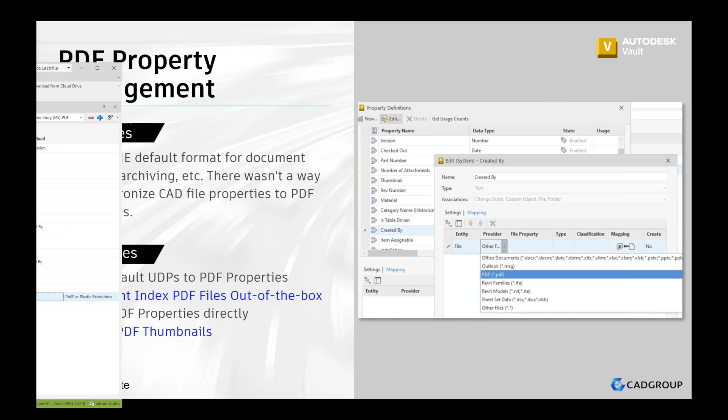Just to give you an idea of what content indexing is: if I'm searching for something at the very top here, let's say I search for the word PDMC, and make sure my file content indexing is turned on. If I search for that, it brings up that particular PDF. Although the word PDMC is not in the file name, nor in the subject or any of the mapped properties, it's called up because it's actually read the text inside the PDF itself and brought that up in the search results.

In the past, for us to achieve this, we needed third-party iFilters, which you had to purchase from an iFilter provider and install on the server. There were also security issues or risks associated with those third-party iFilters. Now you don't need any of that - it's available inside Vault straight away.

One thing you'd also notice is that now I have thumbnails, actual proper thumbnails for PDF files inside the Vault client. In the past, we'd only see a PDF icon, but now I've got a thumbnail. Of course, you can still use the Autodesk viewer to view that PDF directly, but the thumbnails are quite an interesting addition.

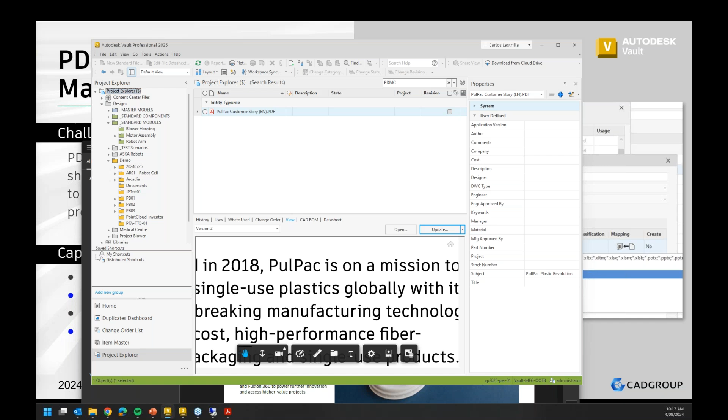Some of our customers have actually requested this particular feature - when you look at something inside the thin client. Let me log into the thin client... those thumbnails will also appear for PDFs. Sorry, I did not approve or release that PDF, I should have one that's approved. Bear with me - there we go. So that's a PDF, and you can see the thumbnail. Now, it's a bit small, still a bit small. Even if I increase the thumbnail column, it only stays that size.

So unless you've got zoom on your browser, and when it zooms it's not really giving us the expected result - at least it gives us a step, one step towards a great solution. But I find that very, very useful.

Just had a look at a question here: do you have to set up an SMTP server on the Vault machine for email notifications to work, or can it use any SMTP server? No, you can use an SMTP server that's outside, not installed on the Vault machine. So if your SMTP server is on another server on premise, or on the cloud like Office 365, you can do that. Michael, I hope that answered your question.

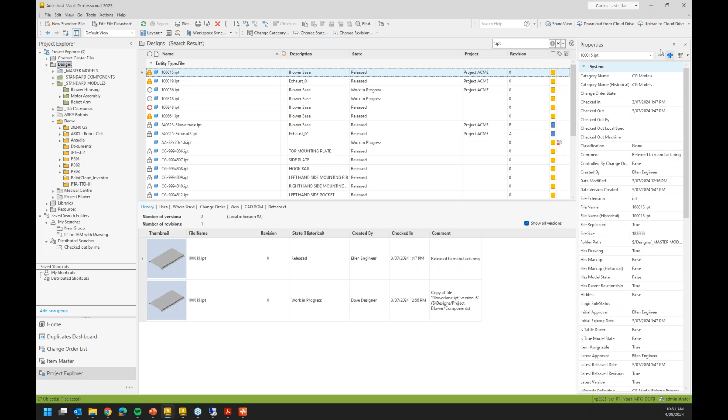Okay, one thing to be careful of is that search is now applying all throughout - that filter. So what you want to do is make sure that after applying that, you untick it. Otherwise, you might be wondering why your search results aren't giving you the results you're expecting.

This is another thing from the idea station: if you use items or custom objects, you couldn't copy hyperlinks for them. In the past, this option was always available for file objects, but not for items and custom objects. Now for items and custom objects, you have that copy hyperlink option. I will say though, it's still one item or one file at a time—you can't select multiple and do a copy hyperlink for everything at once. By the way, if you look at my slide deck at the bottom, you'll see which version this applies to. This specific feature is available in the 2025.1 update. Throughout the presentation, you'll see which update each feature applied to.

This is another one I find very useful, particularly from a troubleshooting perspective, related to multiple monitors. Let's say you're working from the office with two monitors plus your laptop, using Vault, everything's fine. You go home, unplug your monitors, and work on a single monitor or a different configuration, then do some Vault activities. All of a sudden you do, say, change state, and nothing happens—the change state dialog box doesn't appear. What's actually happening is the dialog box has appeared, but it's off screen because it was expecting to show on a monitor that's no longer plugged in. Now with Vault 2025, you can run a command line prompt—basically the Vault executable plus reset dialog locations—and it will bring everything back into the original screen.

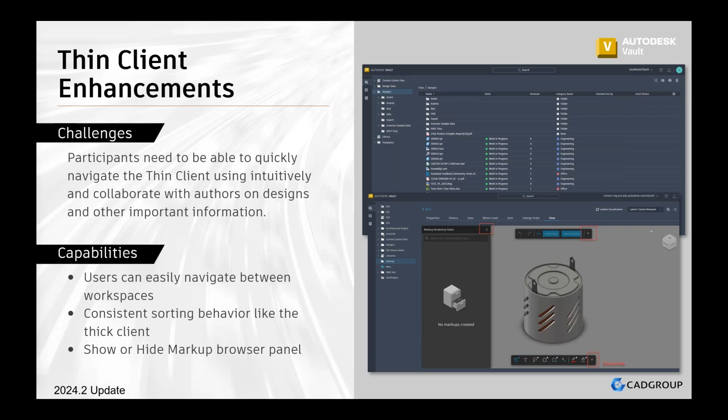Now if you look at participants, for those actually viewing the files, particularly those using the thin client, there's some small improvements. You can now navigate easily between workspaces, and let me give you a bigger view of this. You have these icons here on the side to navigate through the different workspaces that you've got. So that's quite useful.

You also have the sorting behavior when you're looking for files. The sorting behavior of the columns is very similar to the Vault thick client. In the past, if you had any shortcuts, it would put the shortcuts at the bottom, even though they were the same name. Now it groups them together consecutively as long as they've got the same name, same as the thick client. You also have this small feature: if you've got a very deep folder structure, which I don't, but there are some cases, you couldn't move this bar in the past. Now you can move that bar.

In terms of other enhancements, now you can also add your own logo into the thin client quite easily. In the past, there was quite an extensive workaround for that. Now that's out of the box.

You can also set what is the default landing page, so that when a user logs in, they will automatically go, for example, to the files workspace as the default. You can also hide other workspaces. So if you're not using items or change orders in your Vault, you might as well hide those workspaces, so that users who are using the thin client will only ever have the Project Explorer, the files area available to them.

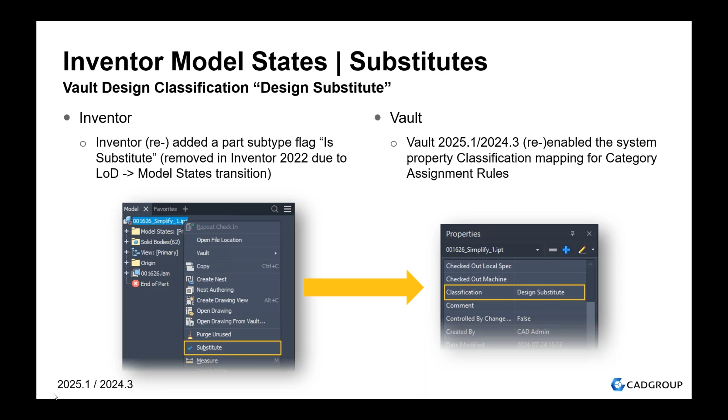The DXF flat pattern - when Vault 2024 introduced creating DXFs into the job processor for Inventor files, in the past, if that IPT file did not have a flat pattern, it would just say it could not create the DXF file. Now it's more explicit, saying it can't create the file because there is no flat pattern for that file.

Now, in terms of looking at the results of a job processor, in the past, if the error was long, or especially if you have a long folder path, you couldn't exactly see what the error was if you looked at the results panel. But now in Vault 2025.1, the scroll bar is available, and you can use Control-A and Control-C to copy everything. Again, a small thing, but to those who troubleshoot Vault a lot, this is a really big help.

In 2024, there was a new feature in Vault where, particularly for Inventor users, you could define where in Vault your design data and templates are, so that whenever a user logged in to Inventor or Vault from Inventor, it would automatically update your design data, style, and templates on the local machine. So if the admin had made changes, it would apply them. The problem was this would happen for admins too - if they didn't check in changes they made to design data or templates, closed Inventor and Vault, and opened it up again, it would overwrite everything for the admin, and they'd have to start from scratch.

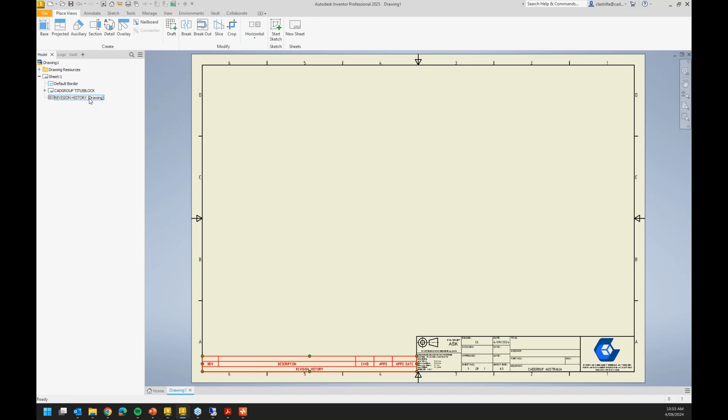So, for example, I'm going to create a new drawing template here. In this particular title block, I'm going to edit that definition. That rev number here - right now it's reading from the standard iProperties of the drawing, but you can actually say that I want that to display the rev number of the model, or whatever model you've assigned to it.

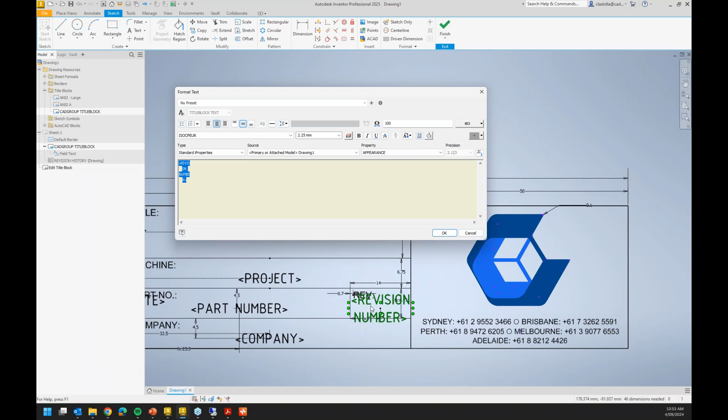Okay, so now this will reflect the model. Now inside Vault, obviously this will reflect the model, but the I property of the IDW itself will still be on its own. So what you might want to do then is, again on a template, on the document settings you have an option here under drawing, copy model I property settings, and you can say copy the model rev number.

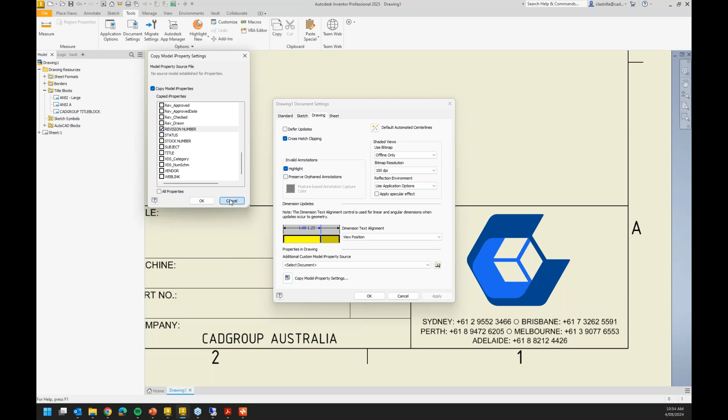What's my rev number? Oh, that's strange. Rev approved, rev drawn, revision number. Sorry, there it is, going blind. The rev number - copy this to the I property value as well. So you can do that method as well, so that you're sure that the I property of this particular drawing is the same as whatever is in the model.

All right, no worries, Lee. Any other questions? Just having a look at our list. No, nothing else from what it looks.